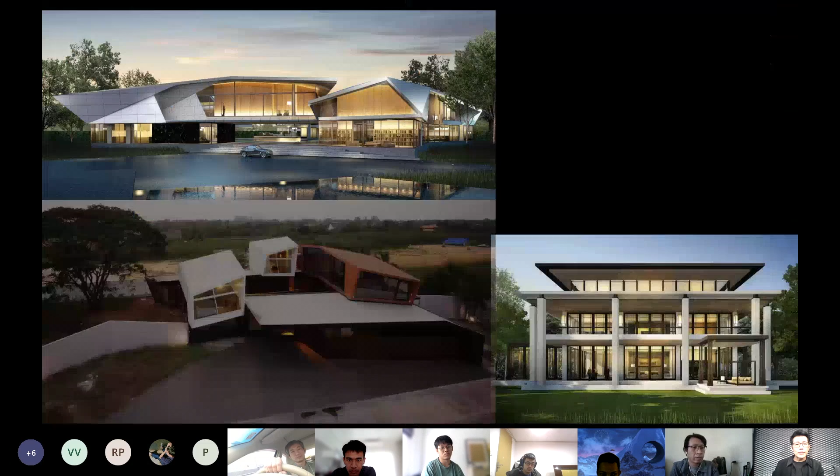Based on this very long experience - 20 years is quite a lot - I'll give you what I've experienced and what we've developed so far, especially things related to the design industry, specifically architectural design, which directly relates to your class. I think your class is basically about programming, so I'll try to emphasize those programming issues for the project I'll give you today.

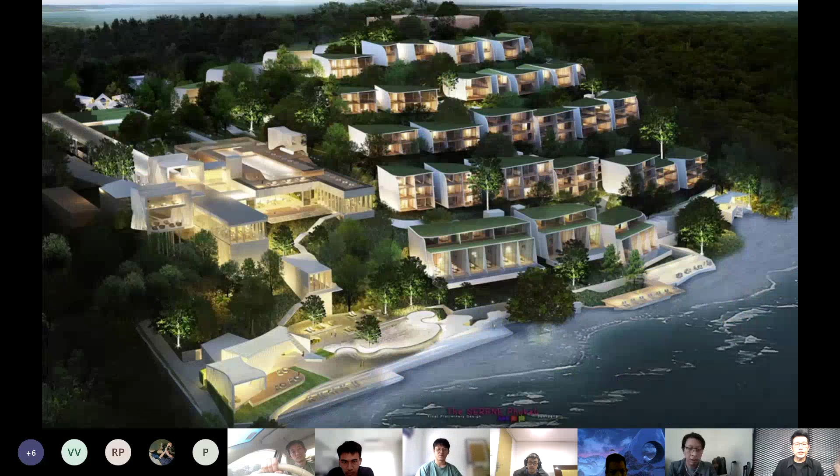So basically, some of my project experience ranges from small-scale house design - and in fact it's not that small, some houses I'm doing now are about 10,000 square meters, so already large scale - to master planning and high-rise residential development, some condominiums you might have seen before. I'll quickly run through all the slides - also some low-rise residential projects I've done, and hotel projects: small scale, large scale, high-rise, resort, and condo, those with mixed-use functions.

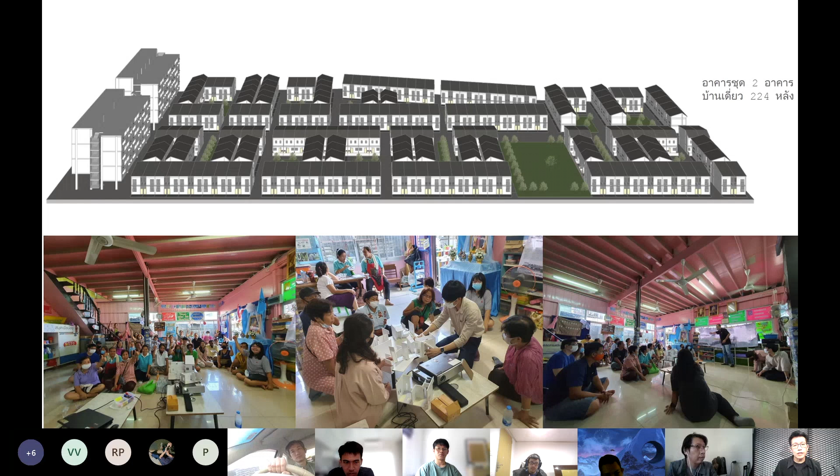Also the project we are doing includes some museum design - this is a museum of art we're developing, currently under construction - and some social projects. For example, this is social housing where we also provide consultancy free of charge to help develop the community and achieve a better quality of living.

So what we are going to talk about today is the actual programming, specifically on this programming course. But I think, basically from my experience, programming is part of the design. And in fact, somehow it would be the key component of the design as well.

Because when we are thinking about developing the project, we need to come up with some interesting program. When I mention interesting, it means that it's supposed to be interesting for the people who are going to use it, the user of the project that you are doing.

So in terms of the architectural career, basically we normally understand that we need to know art, right? And we need to know engineering. So that's the thing that we need to have in the knowledge base that we should have.

Another part that is so important is business and also finance, because I would say that as an architect, the project that you are doing, probably 80-90% of it is really related to business development and commercial factors. The art and engineering is some kind of foundation to develop the design abilities for yourself, to be able to develop the design for all those kinds of building types.

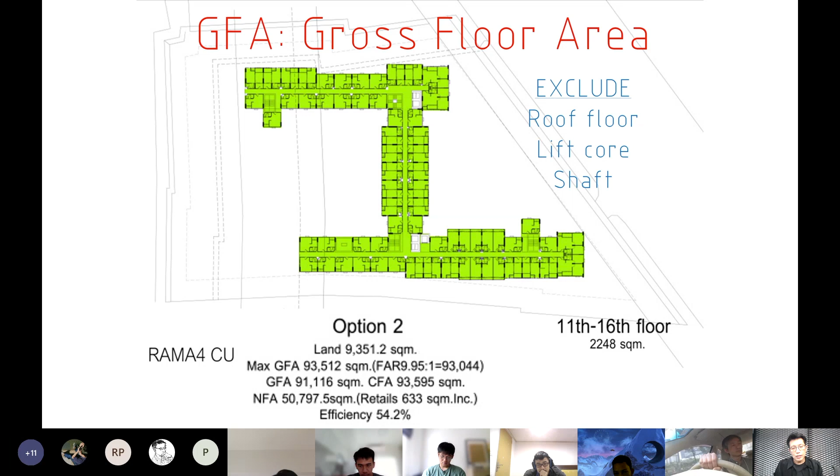This is the basic keyword that the developers always ask you about - how is the efficiency of the project that we are doing?

Then we will come up with all the floor plans like this. This is the 42 high building, with the area table. The area table would be one of the most important pieces of information in every presentation when we have the meeting with the client, and you need to summarize all the building area and all the sellable area for them.

This is the most critical issue every time when we present the design. So you can do some playful design, and it needs to be a proper design in terms of the aesthetic look of it. But at the end, the key bottom line that they will always be focusing on is the numbers. The aesthetic is always less important than the numbers.

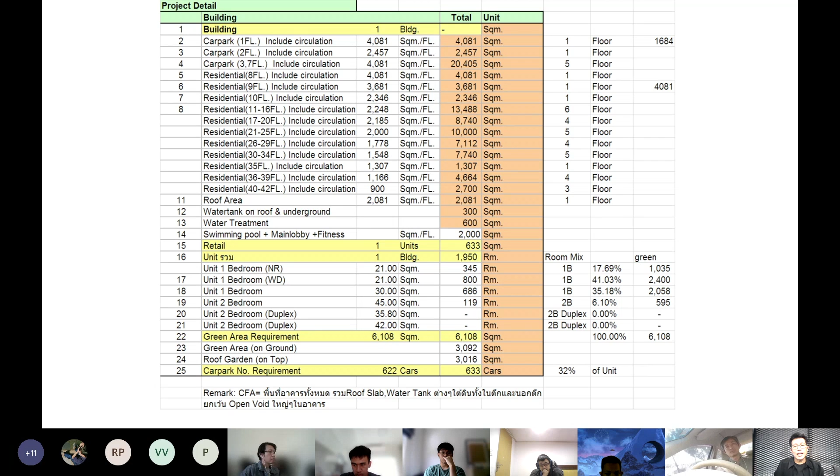Okay, so this is the key thing that they will be asking you every time: how can we compete with others? And it would be directly related to the programming of the project as well, because especially for the condominium building type, unit is unit, right? You need to have a very good standard design unit. It needs to be functional. But however, because of the ability of how the people or how the market can buy the product, maybe they would have some limited budget.

So when we develop the building, we need to come up with some programmatic requirement about what kind of facility we should be able to provide them to make their life fully complete into their lifestyle as well. So this is about the thing that when we develop the design, it's always a competition issue every time. And sometimes some projects also come with a requirement that this project needs to be like the flagship in terms of their business development as well.

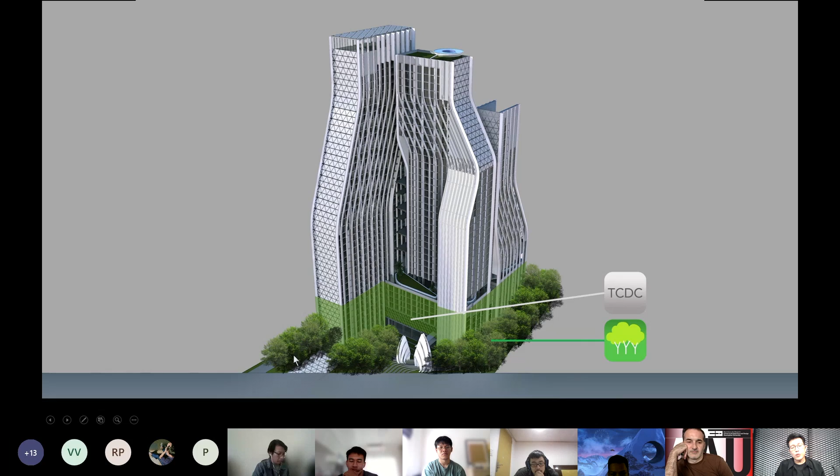We try to create the city forest around the buildings. And this is TCDC. We are thinking of the TCDC as the creative library located in the area, which is the green areas around it.

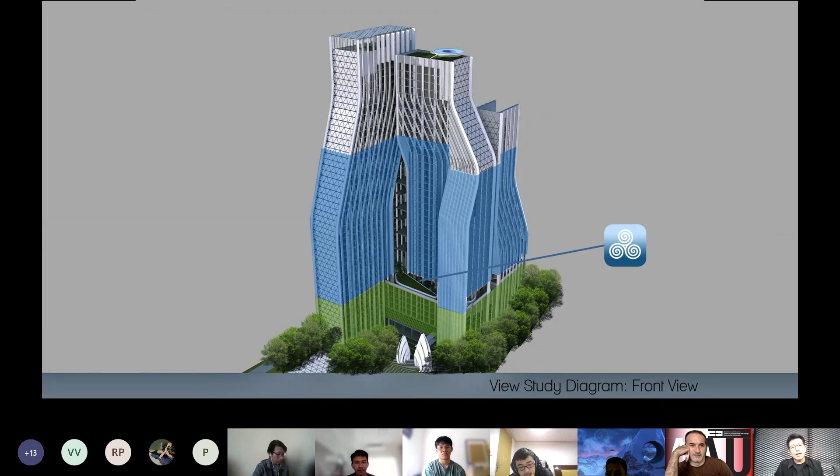And we introduced the ocean concept. We try to maximize the water surface of the swimming pool because the swimming pool is one of the key facilities that people are always looking at, and larger is always better for the swimming pool. We locate them on the 7th floor above the parking block.

Because of some limitation on the project, when I mention the FAR, the floor area ratio, or the maximum gross floor area we can build for each property, every time the developer would require us to design and develop the building to be at the maximum area that can be built. The same thing applies to this project as well, so the project shape would be like the S shape that I shown earlier, right?

So when you have the S shape building like this, the unit located on the inside of the S shape here would be the less valuable unit because they would have more blocking view. They would not be able to see the outside view that much.

So when we locate the pool right here, it's the thing that can resolve these issues. At least some units can be able to see the pool view instead of looking outside to the city skyline. They can always see their pool view like that.

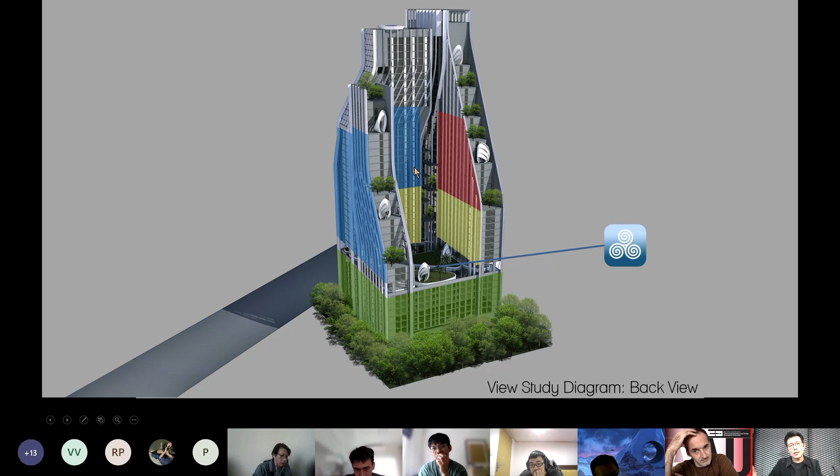So this design development would be helping the marketing team to sell all the units together. And to be fair, the unit with the better location always comes with the higher selling price. The unit with less premium value, something like the blocking view unit or the unit located inside the inner corner, those kinds of units would come with a lower selling price.

And we try to develop this idea and utilize all the podium footprint of this building, which is really big, almost 2,000 square meters per floor, to be the water surface for the swimming pool. We will locate all the facilities inside this area surrounded by the water features. That's the original idea of these facilities.

The thing about developing facilities for a residential project is so crucial because we have very small units to live in, right? So we need some other space, some communal space, to be able to fulfill our lifestyle. So we have the lounge area, sala, water bar, lap pool, jacuzzi, social club, fitness, living dining, or co-working space that we have in many projects right now. That kind of facility would fit these properties.

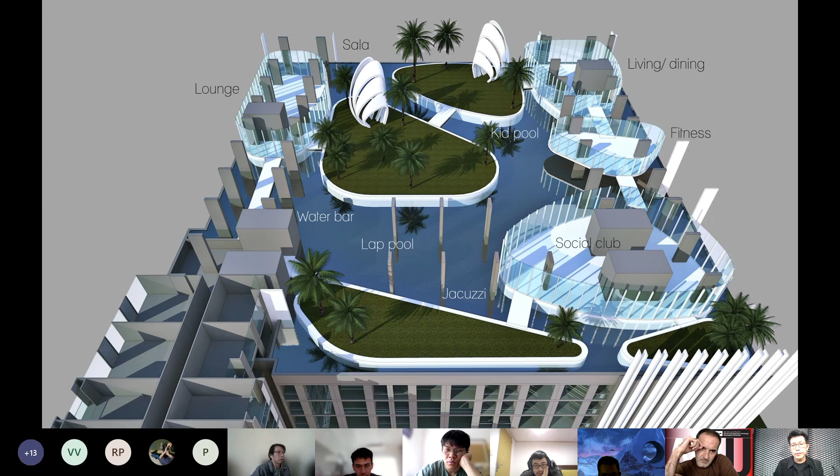And we introduced some curved skyline to the building to minimize the massive look of the buildings. We create some kind of cliff space in the middle of the building footprint, and we also provide the outdoor terrace so residents can enjoy a higher view on that floor.

The cliff area - this is the image of the space we're going to apply to this project design, with the green area on it. We also introduced some higher floor facilities, especially for the top floor.

The highest floor is always the most valuable floor for all buildings, especially for high-rise buildings. Not all residents can access all floors, because the rules of living in a condominium are such that if you live on the 10th floor, you cannot access the 13th floor or other floors - you can only access your own floor. So when you're living in a high-rise building, you will always prefer to see the view outside.

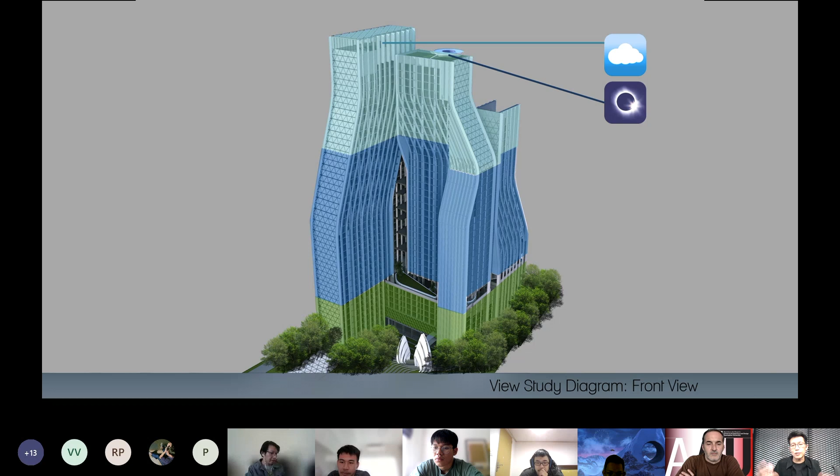So that means that if we can locate the facility on the higher floor, it means that the residents who live or stay on the lower floor area can enjoy the view at the higher floor by using the facility like that. So that's the thing that we came up with. Providing the cloud facility area, we introduce some fancy jacuzzi pool like that.

And even proposing to have the glass floor for the swimming pool at that time. And some party space, because one of the key targets for this project may be the Chulalongkorn students. So they may enjoy mingling with the people, mingling with their friends, something like that. Outdoor theaters up there. So that's the thing that we propose.

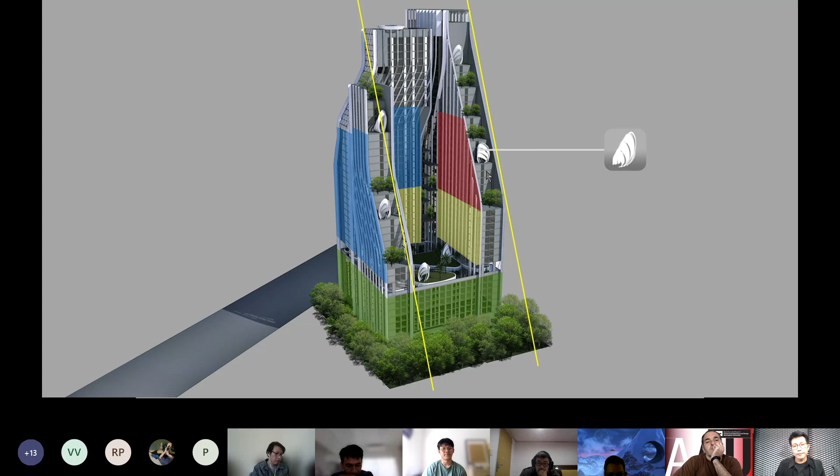Because of the limitation of the regulation, we have the setback issues on the back side. We have one public road right here, so we need to provide the setback like this, 1 to 2. And we try to utilize those stacking spaces to be additional function for the resident. It could be the sala area where people can enjoy the city view outside, something like this kind of space.

Or we can create some fancy pavilion, and we may be able to locate some large scale sport facility in that building, like that. This is our proposal to the concept design at that time. But at the end, it would be optimized. And we apply this kind of concept to 2 projects together in 2 different locations, altogether about 1,800 units.

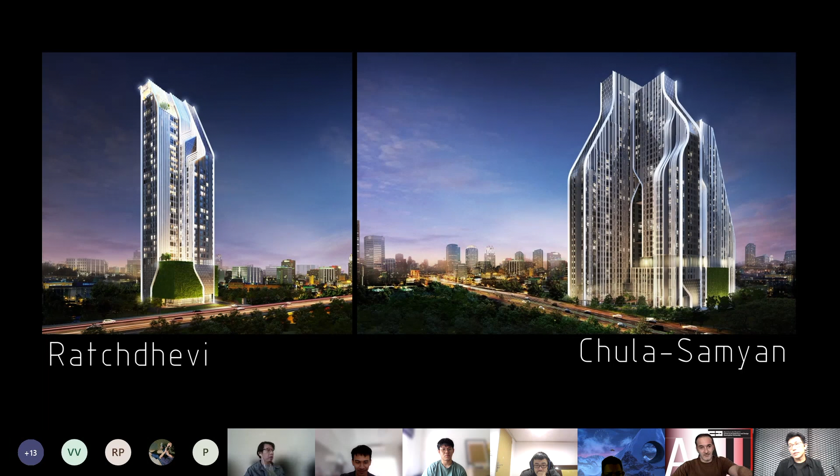And the location always comes first for the property development. Connect with the MRT and BTS, always the criteria and requirement of the people who buy the properties, and location with the dynamic movement of the cities. At the end, we sell it after we complete the development, and we optimize the function from what we propose - 7 facilities had been optimized to be only about 5 or 4 facilities for each building because of the practicality issue and the cost and budget as well.

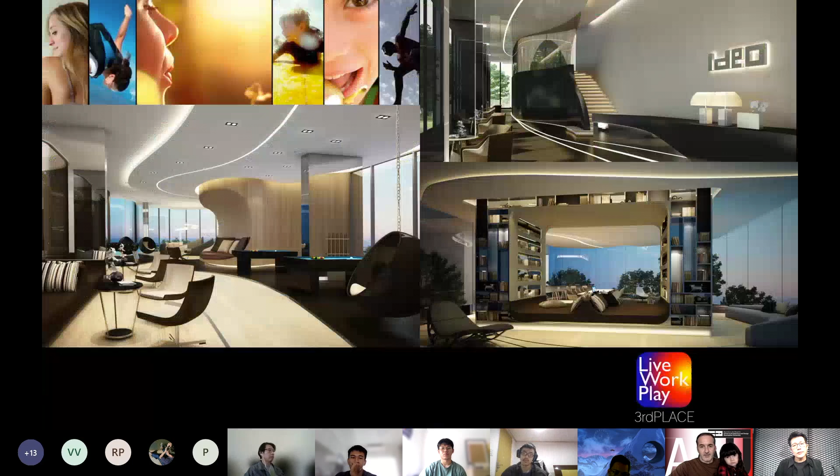So like this, and those become the selling tools for the marketing teams. And 2 projects launched together using the same concept is about trying to create some marketing impact to the market - spend less and get more by having 2 projects developed together.

And those 1,800 units sold out in 2 weeks. That's 2 of the most successful projects that we have developed with the developers. So this is the first project. I think we spent too long a time. I will try to be quicker.

Okay, so when we are developing a project like this, basically we need to understand how the investment comes up, how people are going to invest in the properties, and the condominium is one of the dynamic building types. When people buy things and then sell things, they get the profit quite a lot - a huge amount of profit can be achieved if they are a good investor.

So 3 types of investors that always invest in condominiums are: one is the speculators, another one is capital gain, the last one is the yields. I will not give you more details, but I think those 3 keywords you can search on Google and understand what it is. I will just skip to a few slides like that.

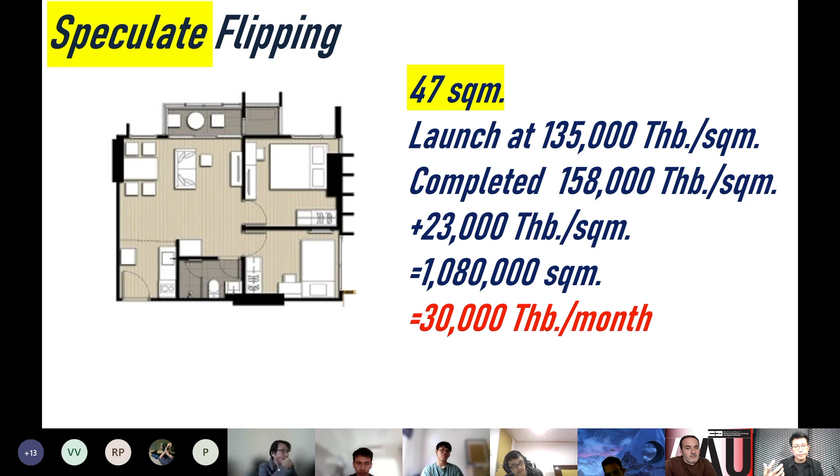So this kind of investment can be played with, and it attracts investment for the condominium product as well. That's the capital gain example. I will quickly run through the next one.

The second project I will quickly show you is about the Ashton. I won't give you too much detail on this project. The key concept here is about having the best location, choosing the right land to develop the property, and having sky facilities.

As I mentioned before, the previous project located the facility on the lower floor. This project locates the facility on a higher floor, making it more premium than the previous one. This project would be sold at 190,000 Thai baht per square meter, about 30% higher than the previous project.

We developed this project's location using the brand of Ashton, with a design like this. When we program the function inside the unit, the hierarchy of developing the unit design for a condominium is much different from designing a house.

For example, if you are designing a house, the bedroom would be the last room you reach. When you enter the house, you'd get into the living room first, dining room second, maybe the pantry, and the bedroom would be the last zone of the house.

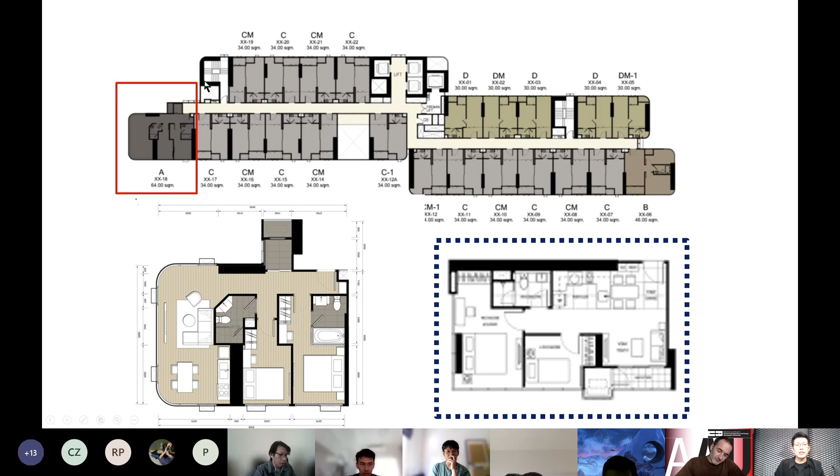There are some dead-end issues you need to consider when designing buildings. This is the look of the unit we sell, which became the feature unit of this product, and it was sold out very fast.

We apply the same concept to these properties. This is the unit mix you need to understand as well, directly related to the building's program. You can see we have 5 main different unit types, which we call A, B, C, D, E.

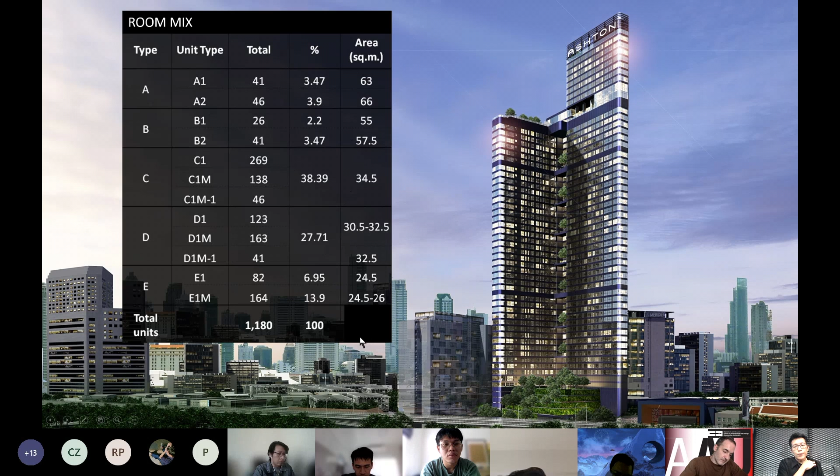You can see that the majority of the units in this building is about this type. 38% of it is 34.5 square meters, and another 27% is 30 to 32 square meters. So these two units are the majority. The second most common would be the smaller size, 24.5 square meters. So this unit mix is the first programmatic information we need to receive from the client.

And the way we locate the units on each floor, you can see the majority are located in the middle area, and the biggest size units are located right at the corner of the building, something like this. The 53 square meter unit is located right here, and 63 square meters, the largest unit type in this project, is located at the end corner. We have another 57, and we have a 66 square meter unit located right here.

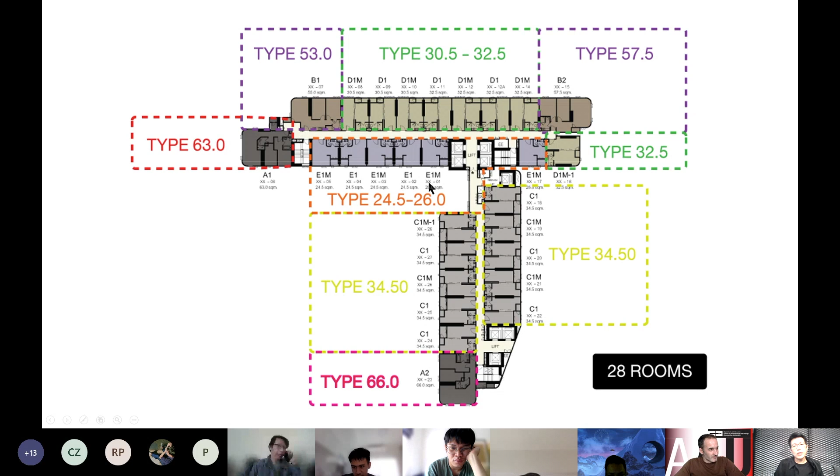And we have 2 passenger lift cores because the building is quite long. From this to that area is longer than 60 meters, so we need to provide at least 3 staircases in this building. So this is the basic building floor plan configuration.

And this one, we locate the main facility on the 49th floor. The swimming pool side right here is about 50 meters long, so it's the longest pool at the highest floor today in Bangkok. And all the relevant facilities are located on the same floor as the swimming pool right here.

Okay, just to show you a clip of this building.

Okay, so the pool is really one of the best pools in town right now, with a really nice city skyline view.

And from the front, we have the podium parking that we cover by having very high density landscape design. And this is the lobby area, which needs to have a luxury look most of the time.

And this is the entry area to the lift hall on the first floor. This is the unit design, and this is the majority of the product, 30 to 35 square meters, 1 bedroom.

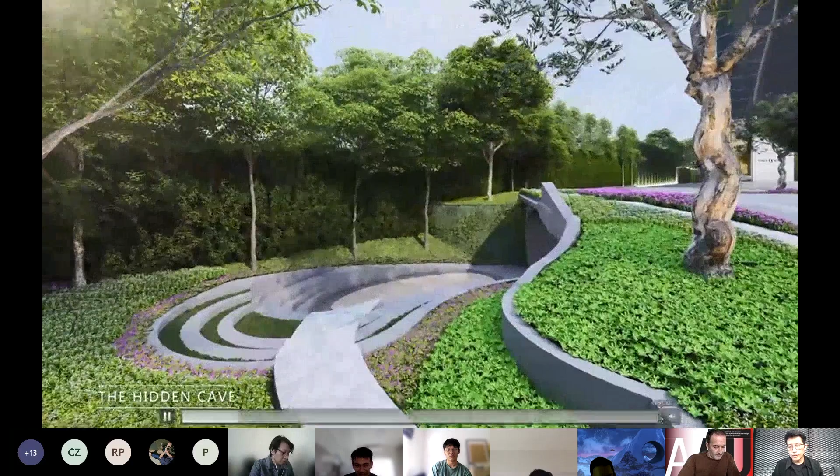And there's a green area outside. This project uses a 100% automatic parking system, one of the very first projects to use 100% automatic parking. It's a very slim building, 208 meters height, highest in Chula Samyan - that's the way they try to set the benchmark. The lobby lounge is very big, with some convenience store and also some retails, and again it needs to have a luxury look every time. And there's a co-creative space.

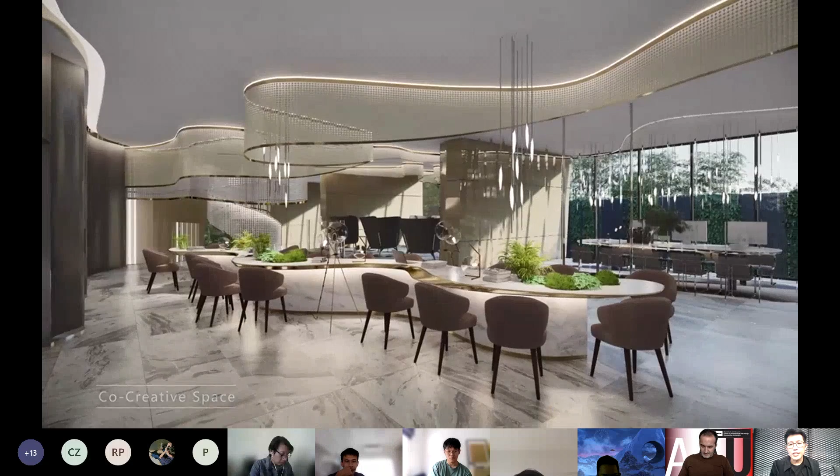This is a loft design unit, the unit with higher ceiling height, so the resident can fit a mezzanine inside the unit. That makes, for example, a 30 square meter unit become a 45 square meter unit, something like that, and that creates more value in terms of investment.

And with very impactful panoramic windows, almost full height, looking toward the Chao Phraya river view like that. We locate the facility at the very top floor. We intended to locate the pool on the roof floor, but it's impossible for this property because of the required green area we need to provide, so we have the green area on the top floor and locate the pool underneath that green area.

And this is the outdoor terrace where people can enjoy the city view outside. This is the main co-living space, co-kitchen, co-pantry located right here, and we also have the bar so people can enjoy their time during sunset or sunrise. And this is a white club, with some sky garden outside the facility area.

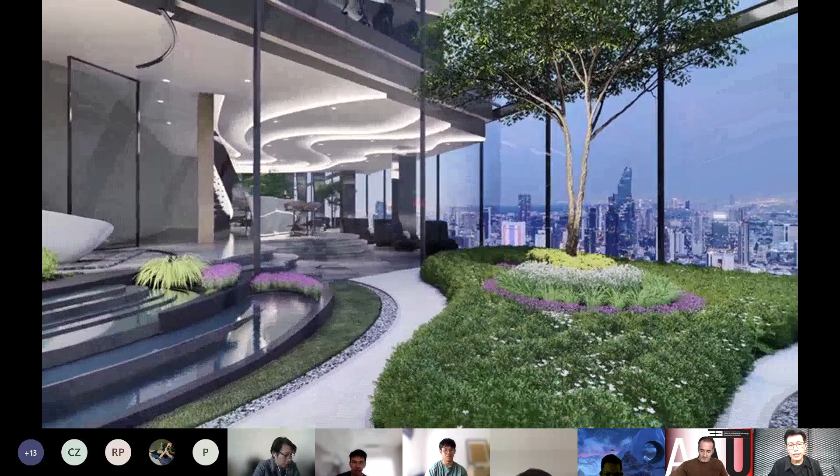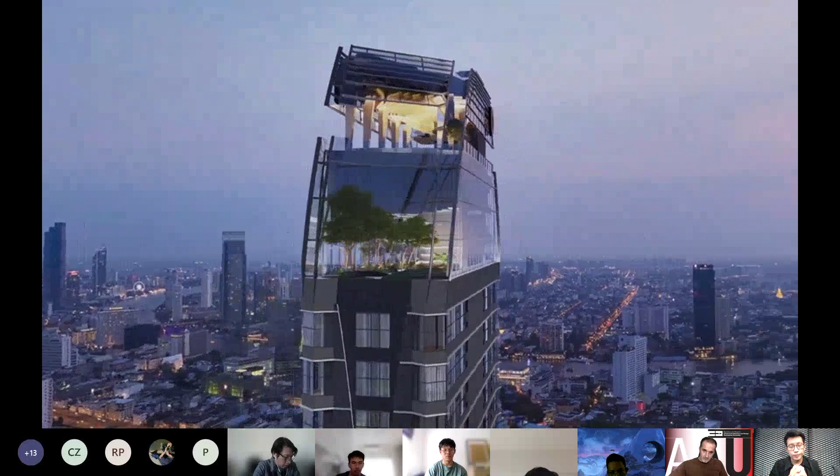We also have the onsen facility, so people can enjoy the onsen rooms with a Chao Phraya River view. This is the top floor facility, located very close to 200 meters in height, and this is the view they can appreciate.

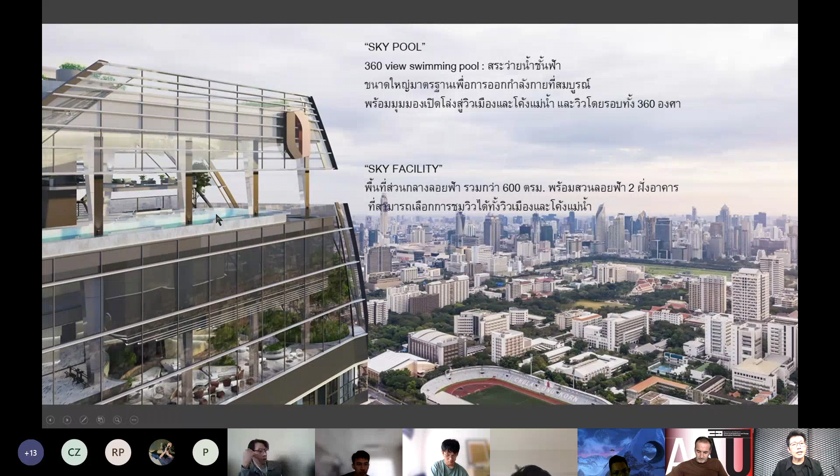Let me quickly run through the basic things about these buildings. There's a 600 square meter garden sky area, with a Sky Garden Atrium up there together with the facilities. We have 100% automatic parking system, and a pool where they can appreciate the 360-degree view outside.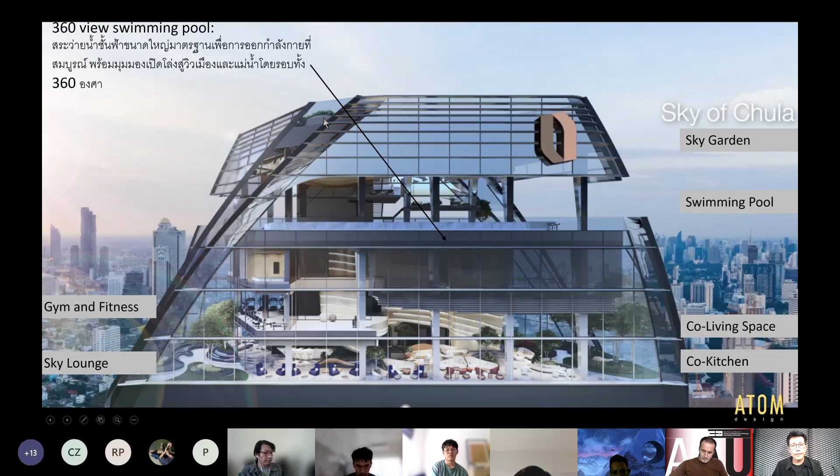This is the cluster of buildings, which is the facility area. We have everything here: Sky Garden, a swimming pool about 30 meters long under shade, co-living space, co-kitchen area, gym and fitness, sky lounge, everything located right here. This view is from the pool looking outside, using the 100% automatic parking system.

We have the feature unit design, the unit with the free column corner and full panoramic window, almost full height, about 4 meters, and we can fit the mezzanine floor right here.

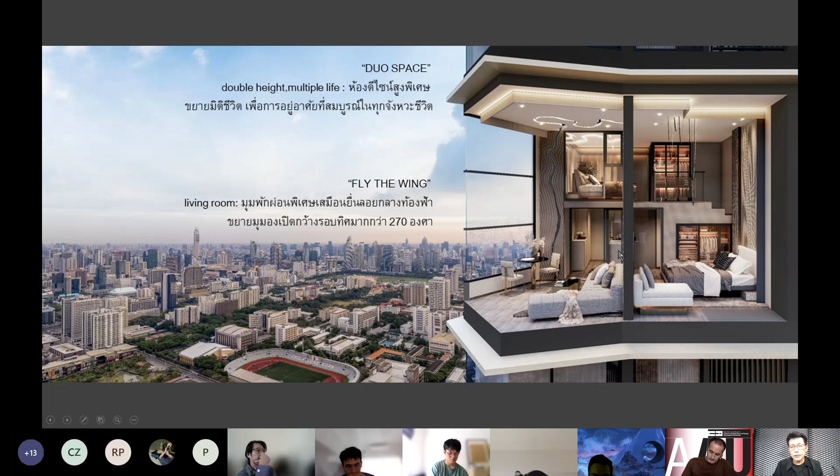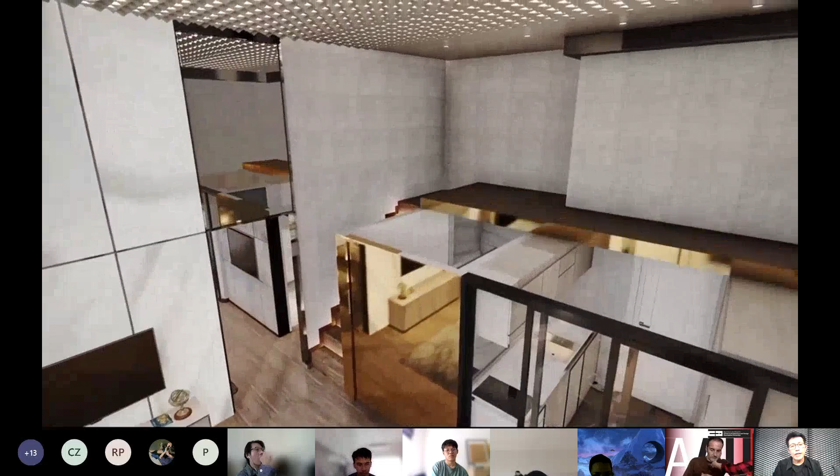In this condominium development, we try to play with some gray area in the regulations a little bit. We do not define this part as building area; we define this part as furniture, which gives us flexibility that the officer allows currently. This makes the unit larger in terms of functional space, so from simplex volume it becomes duplex volume like this, creating more functional area for the unit and serving the resident's lifestyle more fully and properly.

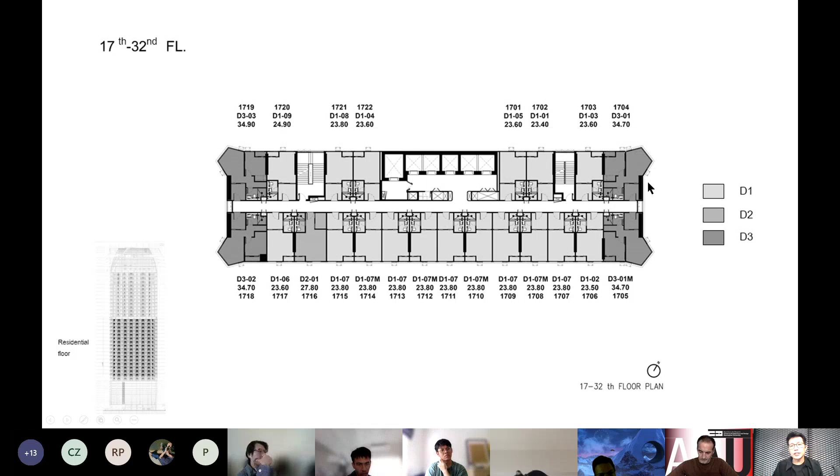This is the basic plan of the building. It's quite simple, a rectangular shape, but we try to emphasize the corner of the building as a feature corner, and it becomes a feature living space for the unit as well.

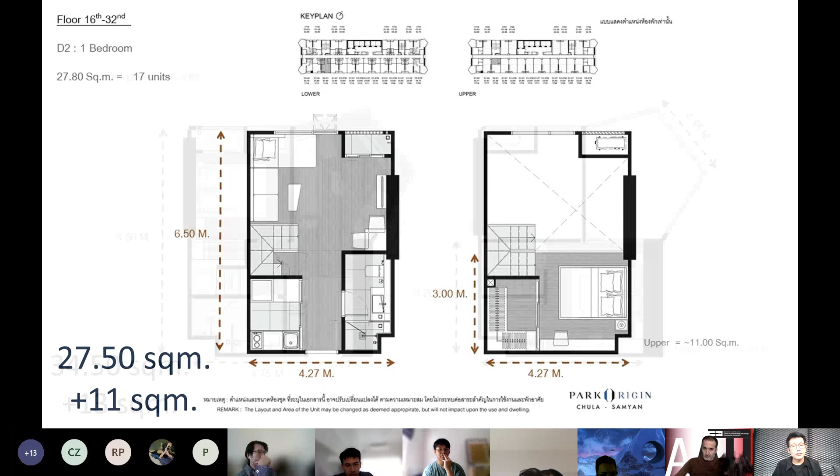This is the unit I mentioned. From 27.50 square meters, you can gain another 11 square meters plus of function, becoming bed area, and then you can fully utilize the lower floor as living space, dining area, and also a working table. This has been applied to all the units in this property, like this, and it makes this project so successful.

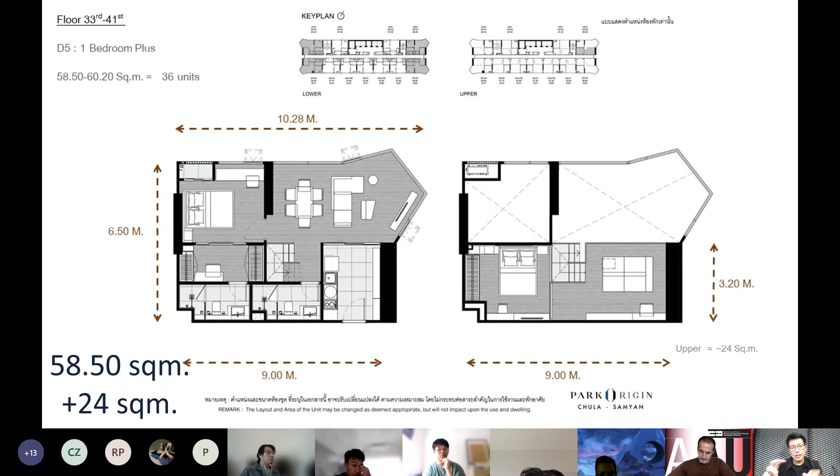This project launched in 2019, which we consider a softened market year for condominium development—it sold harder than it used to. Still, this project is successful because of this kind of high volume design and unit design like this, which makes the product more valuable for investment.

Okay, I'll skip this project and come to another one instead. This also relates to setting the program for the building.

The key concept requirement of this project was to try to create a new benchmark in terms of condominium development. You might have heard of LEED and WELL, two certifications organized by a US organization—LEED is for sustainability design, WELL is for well-being design for people and pet friendliness.

This project tries to focus on human empathy and current people's lifestyle, especially for people who live in cities, considering wellness, well-being, and living quality. We have pet-friendly facilities, and it serves the aging society, allowing multi-generational people to live together, and it needs to serve pandemic situations as well.

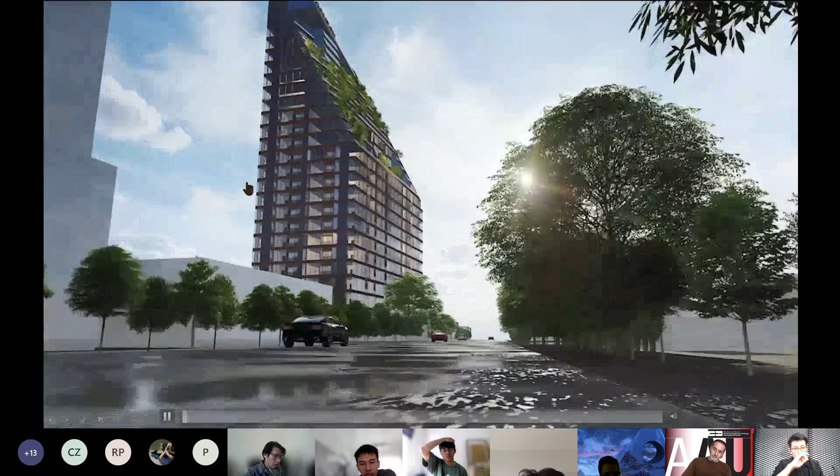So this project uses these two certifications as the key guideline for doing the program and design for the buildings, serving the aging society—our country is already an aging society right now—and serving pet-friendly needs, because people prefer to have pets for relaxation. This building design is for quick animation a little bit.

So this is not a very high or tall building. It's only about 30 floors, but it's located in a very premium property location, and it's the brand Ashton as well.

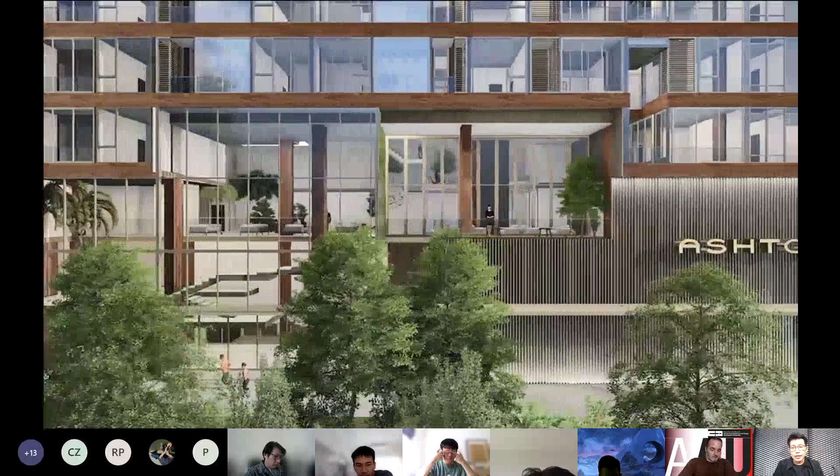This project is under the design stage right now. We need to provide some facilities to serve pets. Having pets in the building is a very crucial issue.

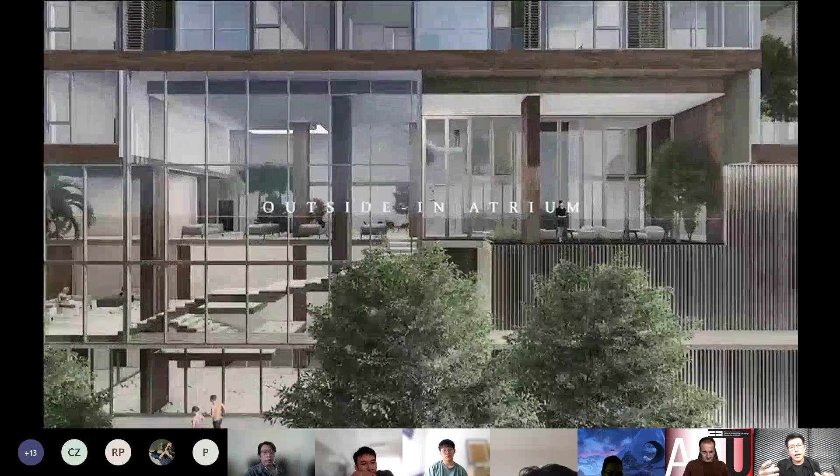We need to provide and consider everything to serve them. And we have an atrium inside the building at the core area. This atrium space allows natural ventilation from the lower floor to the higher floor, creating airflow and improving air quality inside the building for better well-being.

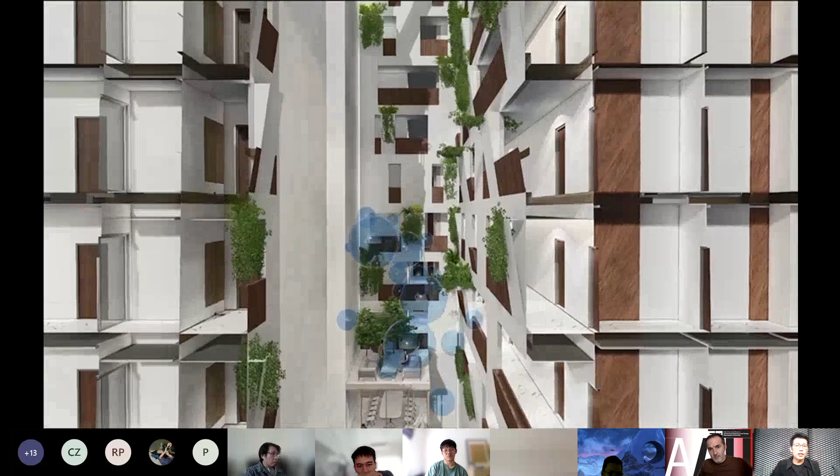So we're using the stack ventilation technique basically. The air would come from the lower floor to the higher floor, or another way, from the higher floor to the lower floor. It really depends on the season.

And we try to integrate small green areas, and those plants would be able to clean the air somehow, to filtrate the air somehow.

This stack ventilation, along with the atrium, also brings natural light and provides it at the proper level to all the floors down here.

And having green areas on the higher floors like that, we try to have as much green area on the buildings as possible. We also locate the pool at the top floor, and we try to implement alternative energy sources, for example, solar panels.

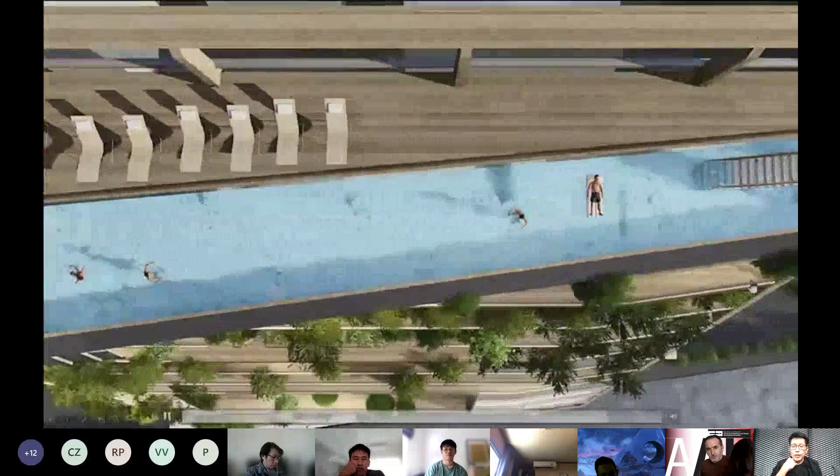So that's the overall look of the sky facilities. It's not that big a building, only about 30,000 square meters. But the pool is still quite long, about 30 meters, on the top floor.

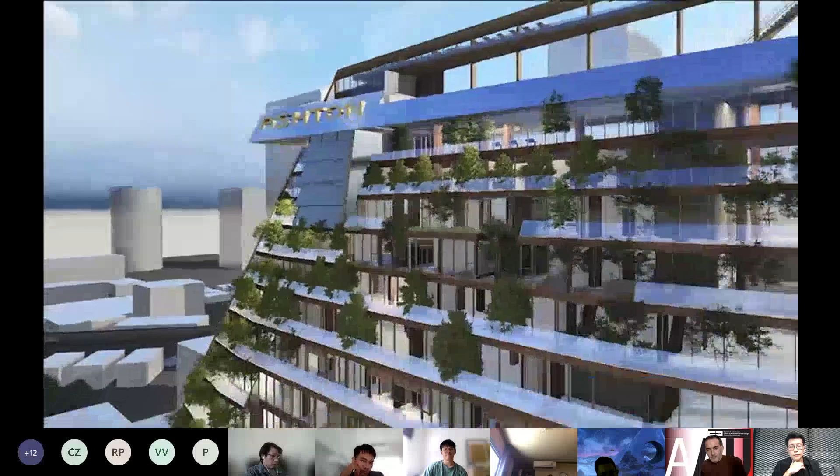So now for probably the last two projects I'll show you, in the Bang Na area, I think close to your project location, I believe - that's what Dr. Ock told me. So I've done a few projects in Bang Na, but I'll show you two of them.

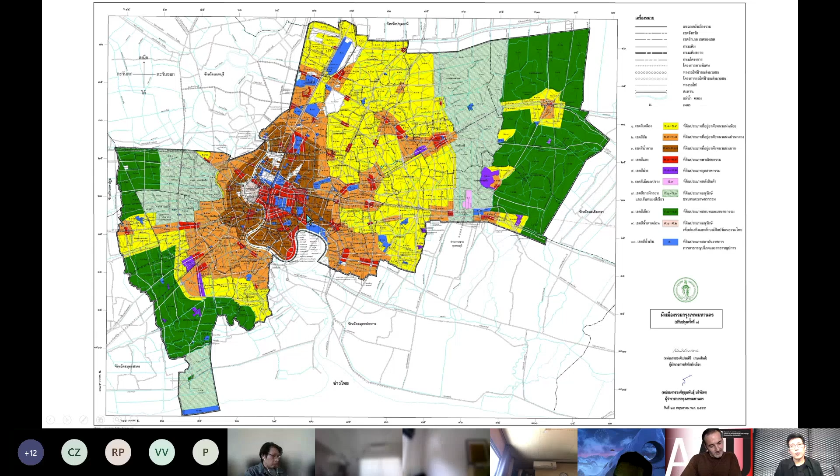When we mention the location, Bang Na is somewhere around here, east side of Bangkok's CBD area. In terms of regulation, the color zone of this area has a floor area ratio less than the central area of Bangkok, probably about 4.5 to 1 or 5 to 1. The project I did is about 4.5 to 1 FAR.

So the first of the two is named Ideo O2. For this kind of project located around the edge of Bangkok, firstly, the land price would be less than the central area, so you can buy more land by spending the same amount of money. By spending the same investment on land, we gain more space, we gain more land, and that's the key selling point of this property development.

The size of the land is about 13 rai in total. In terms of architectural design, we try to limit the building footprint by doing 40-story height buildings and spending only about less than 4 rai for the building footprint, leaving the rest of the land for facilities.

So you can see we have a bike lane, so you can do cycling in the condominium property. We have 3 pools together, very long, very large, located together, and we have a huge green area. We have a futsal field, a skateboard area - we have everything in this property.

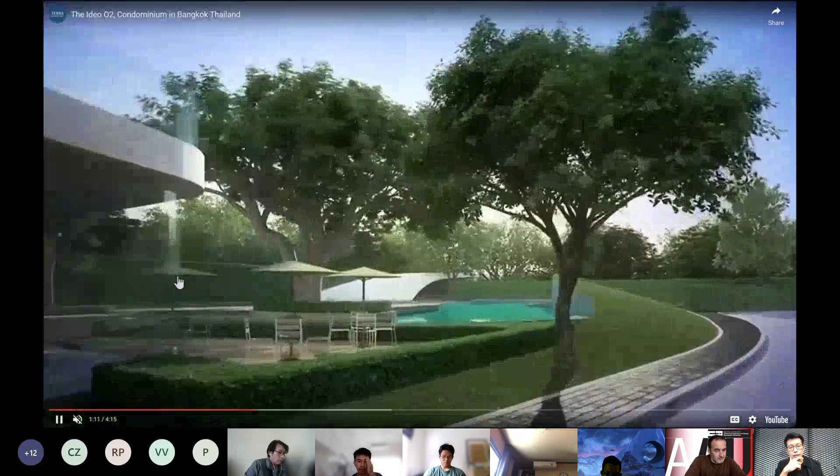Okay, and this is the pool. This is an animation - this project is already complete. I will show you the real picture soon.

And we have 3 pools together, like a resort in the city. Very open, large open space areas. We have a cycling area, a swimming pool area, a skate park, futsal - we have almost everything.

And every time we have this kind of project design, what we try to do as much as possible is minimize the building budget and allocate most of the budget to the facilities. So you can see the building is very simple in design, not fancy, and it's very efficient in terms of construction cost. This tries to emphasize making the facilities the best possible.

So we have a library, co-working space, an exercise area - the largest possible exercise area - and this is the cycling lane, very fun-filled.

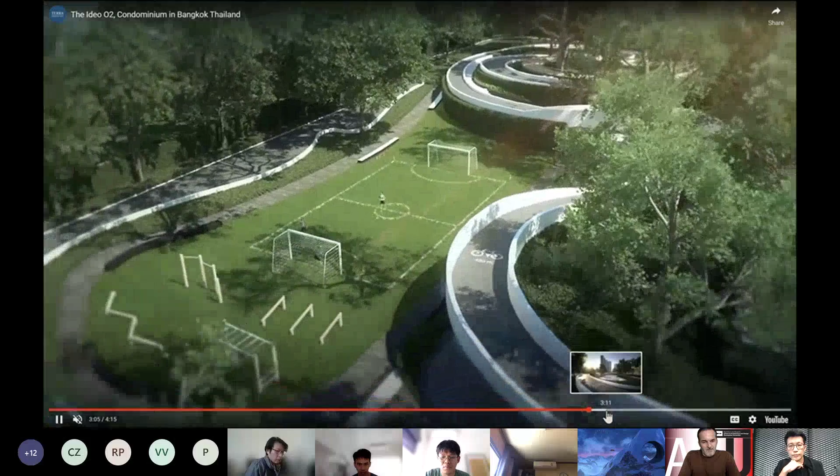Okay, I'll skip through a little bit. Okay, all right.

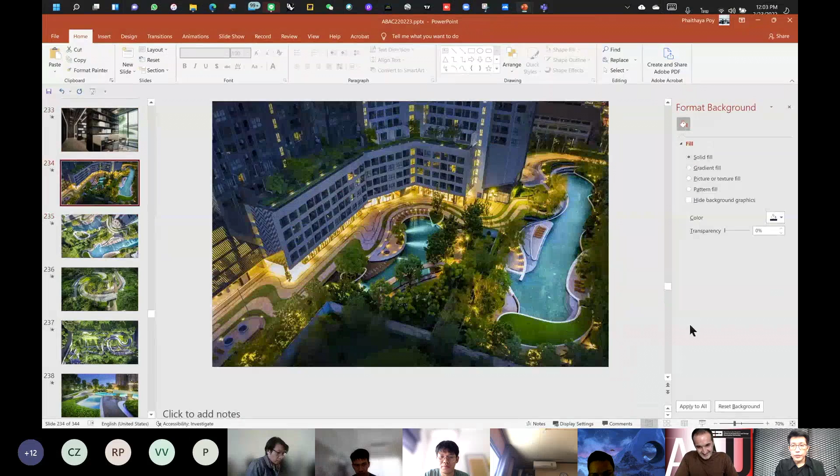And in the real picture, this is the image taken after the project completed. The two pools located right here, another pool located close to the front buildings, and this is the landscape design and the cycling lane that we have.

The facility design for this project received many awards in terms of facility development and design. We increased the green area to the maximum, having a vertical green area like this. This is probably the last project that I'll show you today.

Same context as in the Bang Na area. This project named Elio Del Nest is located in Sukhumvit 103, which is Soi Udom Suk or Udom Suk Road. Not exactly Bang Na, but very close to Bang Na.

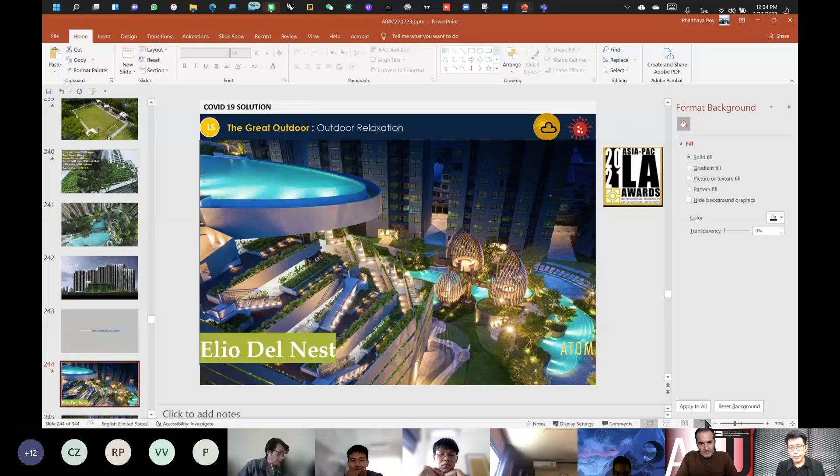Let me show you the clip. Maybe showing you a still image like this is better. Okay, and this is the facility that we have in this project. You can see that it's very complete, and sometimes a little bit fancy in terms of design.

We have two pools in different locations. One pool on the 10th floor above the parking buildings, and the lower pool located in the courtyard area of the project. And we have this.

This project also received a lot of design awards in terms of the landscape design, but the building is so simple, with a minimum budget for the buildings. We increased the green area more than what it requires in the EIA.

When we are talking about the project around the Bang Na area, I think you also need to consider the competitors' projects, one of the very good ones being The Forestias. We need to consider the context of Bangkok Mall and also the mega city under development right now.

So that's all for today. I have one last project that I also prepared if we still have time. It's a mixed-use project. I'm not quite sure if that's going to be useful for you or not.

That would be great. Okay. Don't worry, okay, all right. So maybe I'll show you this project. Okay.

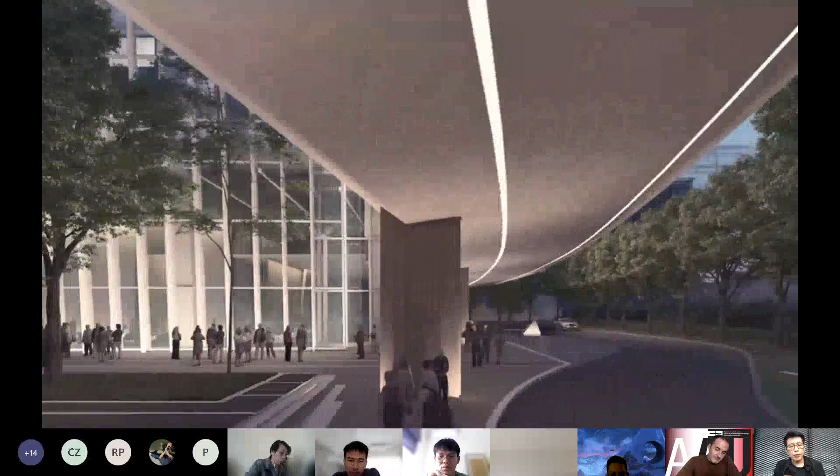And this is the front part of the building. We have the required green area that we need to provide, and we try to create a small park inside the city right here. This is the swimming pool for the hotel part.

And this is the top floor bar and restaurant with the observation area.

Okay, so I should show you the basic diagram of this building a little bit.

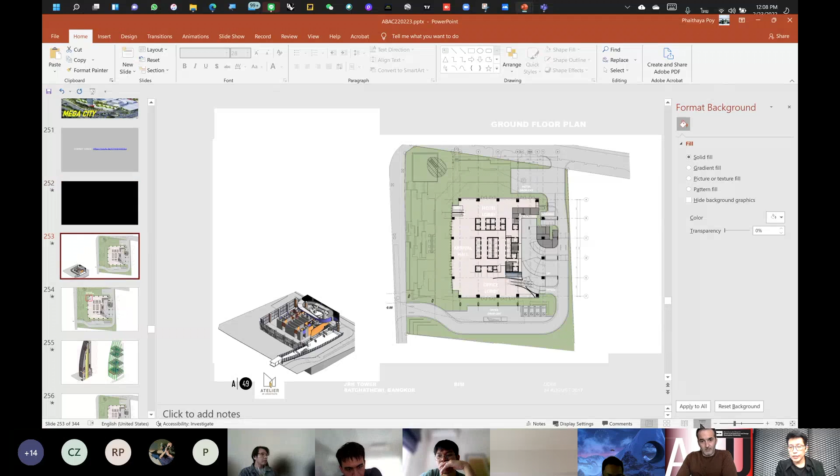Basically when we're doing the high rise, especially for the mixed use building, it's more difficult in terms of designing the core, because we need to combine all the functions together, and each function needs proper security management, since each zone needs to be separate from another zone. That's the basic requirement for doing mixed use buildings.

So we have the lower floor as the main lobby area. The lobby for the hotel is located on the northern side. We have the main arrival hall for the office and retail right here, and also the sky lounge. This is the drop-off area to serve the office lobby. We have a separate drop-off area for the hotel function, and access to the parking area behind the building.

And the core system is located right here. We have 8 passenger lifts to serve the hotel function. We have 2 separate service lifts and fireman lifts located right here. These 2 passenger lifts serve the sky lounge, and the fireman lift is right here. So these 2 serve the sky lounge, and these serve as the service lift and fireman lift. We have another 2 right here to serve the parking floors underground and the podium. And we have 16 passenger lifts to serve the office area.

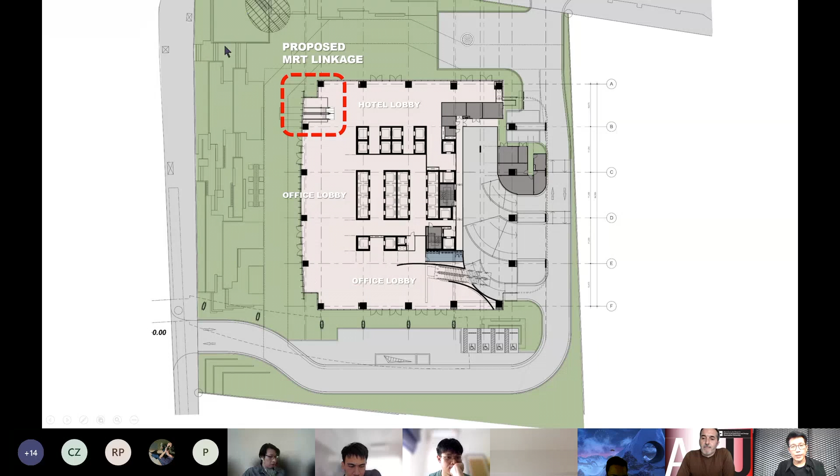This is the section diagram to show how the vertical passenger lifts serve the floors. We have 16 passenger lifts together to serve the office, divided into 4 zones. The first zone is the lower low zone for the office. We have the lower mid zone, the higher mid zone, and the higher zone. So these 4 cores with the 16 passenger lifts serve different floor zones, zone by zone.

This area is the hotel part. We have 300 keys in total, and a swimming pool on the lower floor of the hotel zone. Below this hotel floor there will be another 3 floors for parking space, and underneath the parking space is the retail space and lobby area. We have a 4-story basement underground.

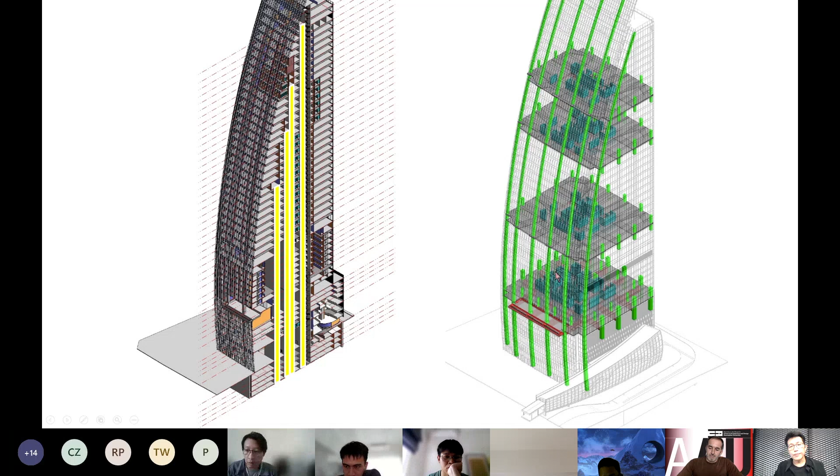And this is the structural system that needs to serve all the floors together. This is the basic diagram a little bit - the second floor, which is the retail space. And we have the parking floor underground, the largest footprint we can do based on the regulation.

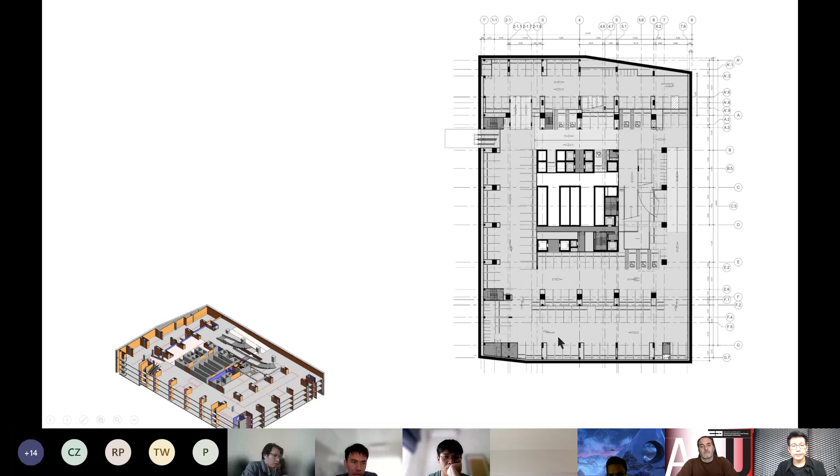And with the connectivity, there's a bridge linked to the BTS station. This bridge would link from the station to the main retail space.

And this is the hotel floor, altogether about 300 keys, about 10 floors in total. So each floor has 30 keys and a communal lobby area in the middle. And we have the pool to the front of the building.

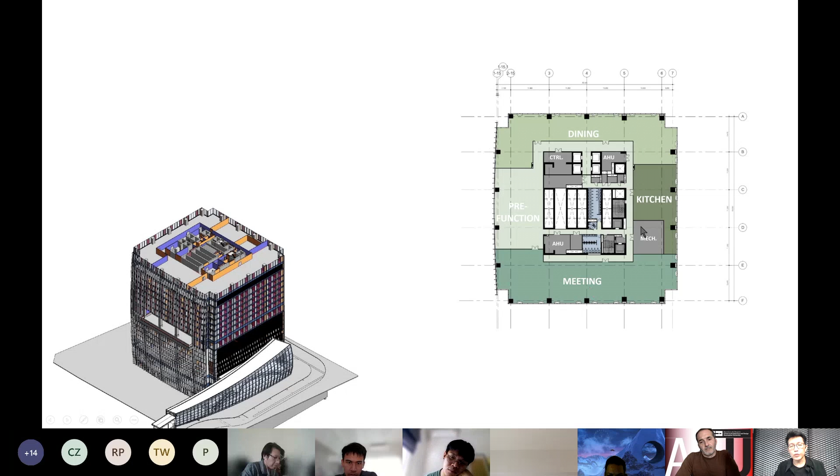And this is the functional floor of the hotel. We have the pre-function and meeting room facilities. We have all-day dining to serve the hotel space, and the main kitchen to serve the hotel function.

And this is the office floor plan. You can see that because the hotel and retail are located on the lower floor, the passenger lifts serving those two functions will not come up to this floor. This floor will have only about 16 passenger lifts serving the office area, and another two sky lounge lifts that would not stop on this floor - they go directly to the top floor from the lobby. We also have another two service lifts serving as fireman lifts on these two corners.

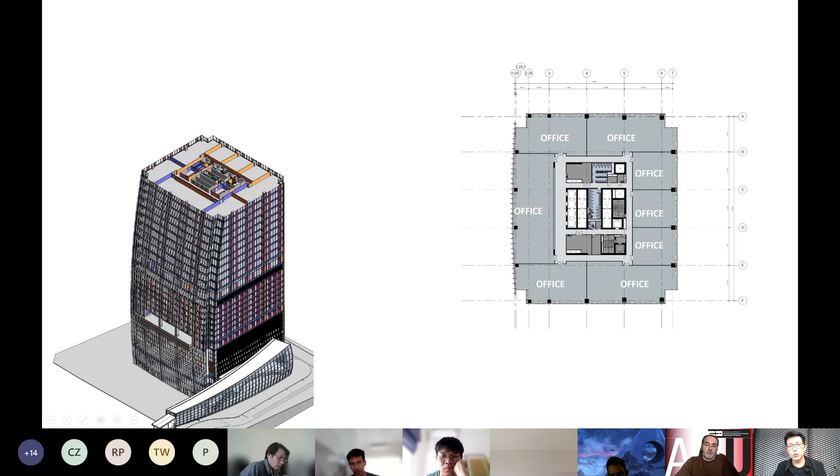So the office division, this is the last zone, the higher zone of the office floor. The higher floor would have the higher rental fee always. So this floor would be more premium and more exclusive, getting the better higher skyline view outside.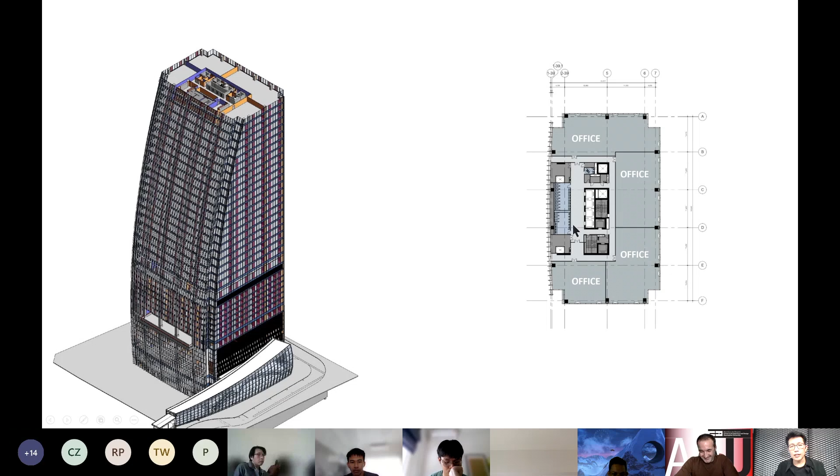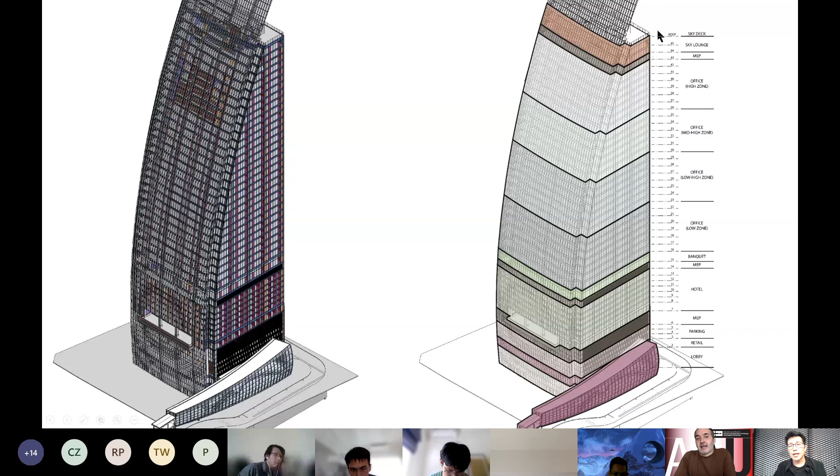So basically we divide the zone like this. Start from the lobby area on the lower floor, we have retails, we have 3-floor parking, we have MEP, like the transfer between the hotel and the parking system. And we have the banquet facilities together with the hotel part, and a swimming pool right here. All 4 zones here is for the office function. The top floor would be the sky deck and sky lounge. And this is the view perspective of the sky lounge.

Just quickly run through all the function. This area is where we locate the evacuation area to comply with the regulation, and create that evacuation area to be the feature area of the building, which is the observation deck. Same as we have in Mahanakhon building, but this one is located right here. This building is about 240 meters height, so slightly shorter than Mahanakhon.

So is that going to turn into a helipad? No, not that, in fact not that size, not that backside. In fact, in terms of regulation, we always misunderstand about the helipad and the evacuation area. What is required on the top floor is 10 by 10 meters, but that's basically to serve as the evacuation area. The helicopter will not park there, they just fly above that, then throw the basket down to get the people up. Yeah, something like that.

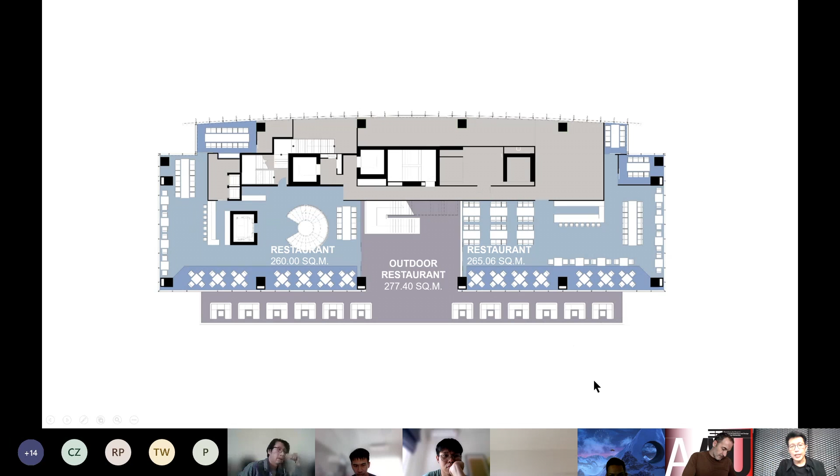Okay, so that's the details. And some about the mechanical system that we need to provide and study together, we'll not get into details here.

One thing we cannot forget is about COVID-19 solutions. In this building design, we need to think about distancing facilities, distancing community facilities, temperature scans, or cleaning stuff. Those kinds of things need to be provided in the building.

Yep, I think that's all for today.

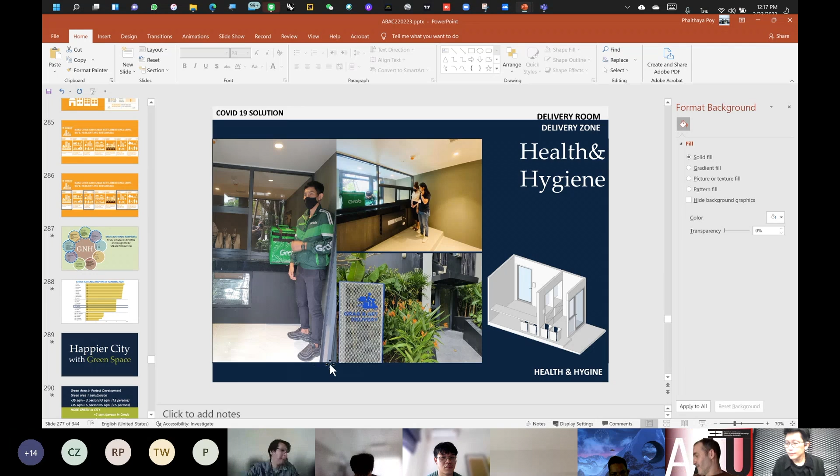Wow, that was quite solid. I hope it's useful for you. Yeah, there's a lot quite significant, a lot of great key points for the students, especially for this class specifically. I've seen a lot on residential high rise, office, mixed use and so on. So anyway, I think it's time for students who'd like to ask further questions, so maybe we can begin with the certain list of questions already asked.

Panay, maybe you want to start. I dropped quite a few questions already. Okay, Panay, go ahead then.

I just want to ask, in the real life of an architect, when you design a residential project, which one should be the starting point? Should we start from interior, like room shape, size, layout, how many square meters, or start from exterior, the layout thing?

Okay, good question, and a simple answer. Okay, we have a lot of mottos. Function first, form after, like that, right? Form follows function, those are basically it. Or somebody talks about functionality and building expression being the same thing.

In reality, when we are doing this residential project, we need to have the unit design first. So the unit design starts from the unit size given by the marketing team for each particular project, because of the selling price, the price per square meter combined with the total area of the unit would be the total price that people would need to pay to get the unit. That's what we call package price. Package price would be the first thing we need to start with.

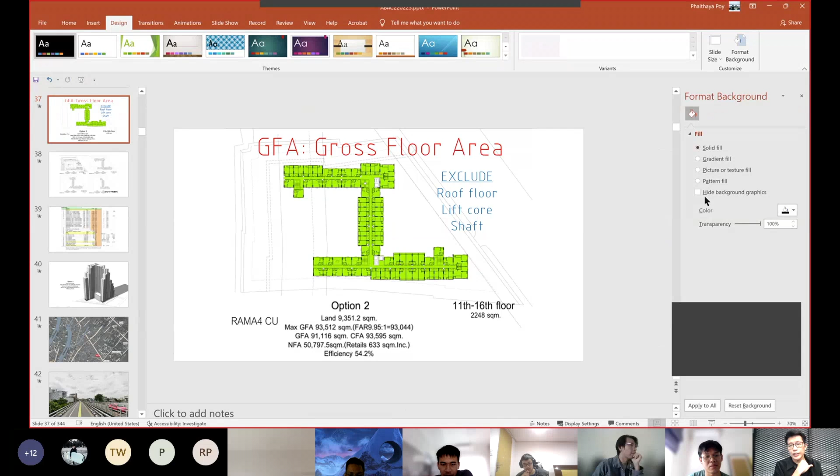Okay, this question needs a very detailed answer. I need to show you a little bit. Because when people mention efficiency, they always have a different definition of it. I will show you one slide, the slide I already showed you before. Let me find it. Where is it? All right, maybe this one.

Okay, so when we're talking about efficiency, firstly it depends on who the client is. The client is the developer definitely, but which company of developers they are matters. One developer would have one definition in detail, another developer would have another definition in detail. When I mention details, it means this.

If we talk about efficiency by GFA, there will be a few different efficiencies. The simplest one is the efficiency by GFA. I would recommend this for your project design, just refer to this one. It's the easiest to start with, because gross floor area is defined by regulation, so any functional area, any structural area would be considered as the gross floor area of the building. So the efficiency by GFA is the simplest one.

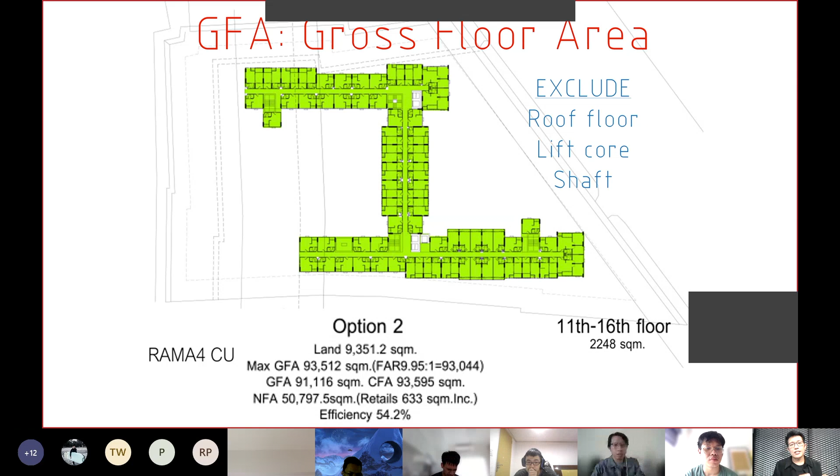So the saleable area that I mentioned is about the area for the unit. If we go deeper in detail, the area that you can count and measure as saleable area follows the principle of the area where people can do things. For example, if you would like to renovate your rooms—if you are buying one unit, let's say this 24 square meter unit—what you can modify, what you can demolish, is the area inside. You cannot demolish the column of the building, so the column would not be counted as the saleable area.

The saleable area would be the area inside the column. Imagine if you buy this unit, and someone buys another unit on the right-hand side, they might knock down this wall and combine the two units together. So that big wall is part of the saleable area—50% of it. If you measure the area of the unit, you measure at the center of the big wall that can be demolished if you buy two units together. But the shared wall here, the building will not allow you to knock down, because it's a structural shear wall—you cannot cut it out. So you cannot do anything with this, and this big wall would not be counted in the saleable area.

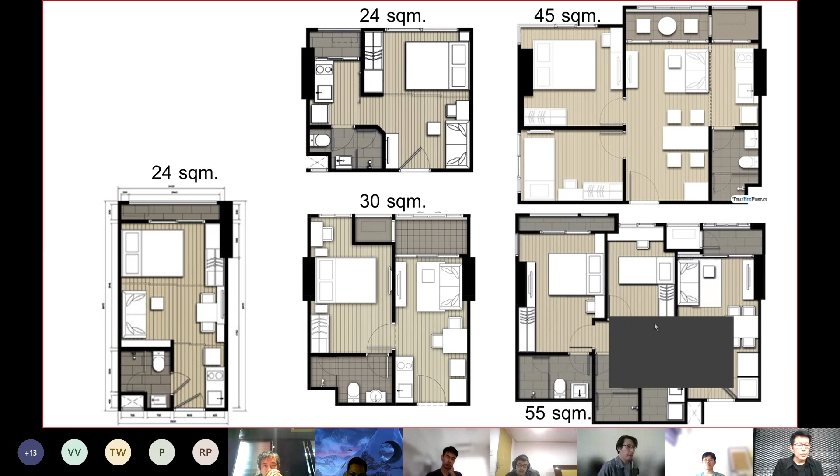Good choice, yeah it's true. I'm living in Ideo too, and there are so many students from ABAC that during the pandemic, because of the facilities you guys design, many students are living here. So any comments or any complaints? Yeah please do, I can do that politely, but I can do it.

No, I just want to say the biggest issue is a maintenance issue. But I just want to take the opportunity, because as an end user of this condominium, I need to say that the design - one of the good things we have as architects is that we can design and improve people's lives with the quality of what we offer in our design. This is something happening in Ideo too. People feel very proud to live in this building, and they create a community. So there is a good sense of community among all.

I think the building has around 1,600 units, right? Yes. There is a very good community between local Thai people and foreigners, because there are so many foreigners living here too. It's been 4 years since the building opened. The main thing is the main square where Pool B and Pool C are - like a main plaza in the condo. So everybody goes down and has a gathering space to interact, to have social activities, and people use it. This is a value of the condo.

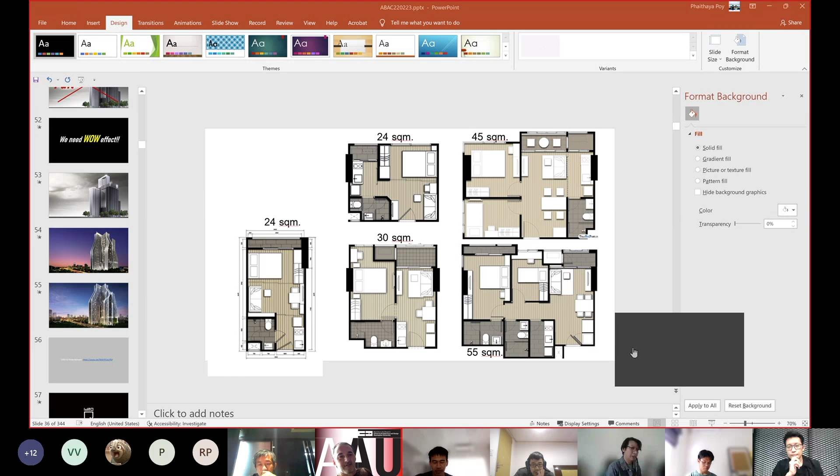So I think it's about time, and I believe that today our guest provided a lot of inside information from throughout decades of experience. This would give you a shortcut to bypass and look forward to the right information. So I appreciate and thank you again.